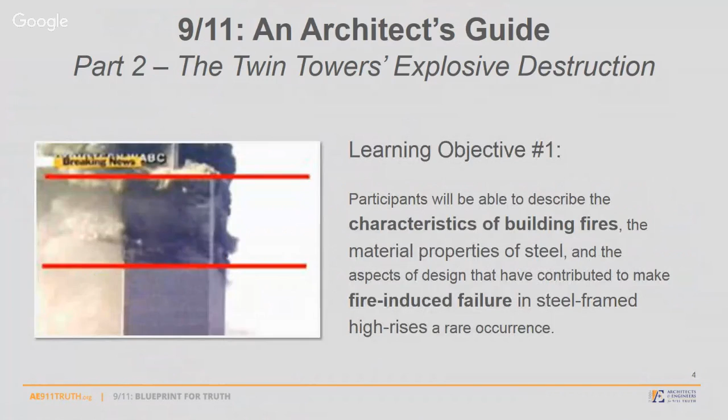We'll be talking about that today particularly. So let's see what we're going to be expected to do as a result of this course today. You'll be able to describe the characteristics of building fires, the material properties of steel, and the aspects of design that contributed to make fire-induced failure in steel frame high rises a rare occurrence - in fact, only 3, and all on 9/11.

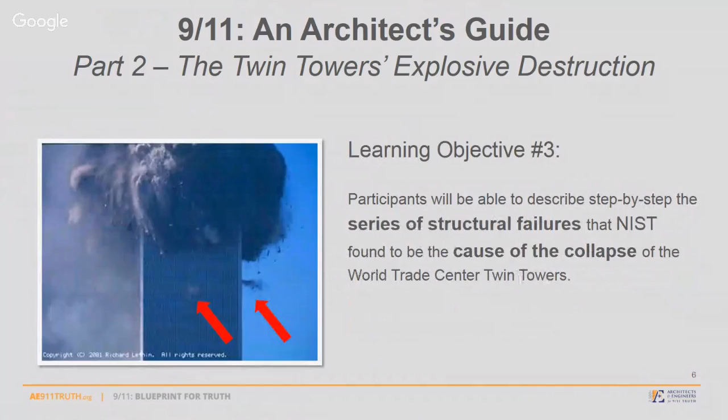We'll be able to recognize the distinct features associated with fire-induced failure and those associated with controlled demolition. We'll also be able to step-by-step describe the series of structural failures that NIST found to be the cause of the collapse of the towers, and analyze the physical evidence and dynamics of the collapses, and see how they're consistent with fire-induced failure or controlled demolition.

So to help us in that, today we'll be looking more specifically at explosions, a sudden near free fall collapse, high velocity lateral ejection, shattering of the steel frame, and the midair pulverization of the concrete.

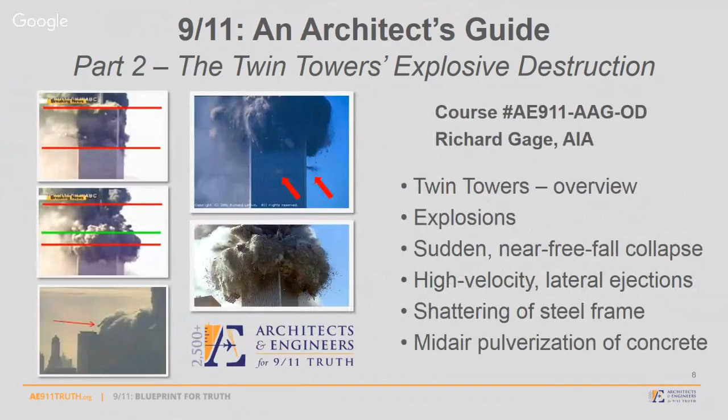So when we look at the Twin Towers, we've got a lot to consume today, but I wanted you to know a little bit about myself. I've worked on these $3 and $10 million gymnasiums and the construction administration for this $125 million high school in the San Francisco Bay Area. More recently, in the Las Vegas area, this $400 million mixed-use project with 1,200 tons of steel framing, where we have commercial parking garage and mid-rise office building.

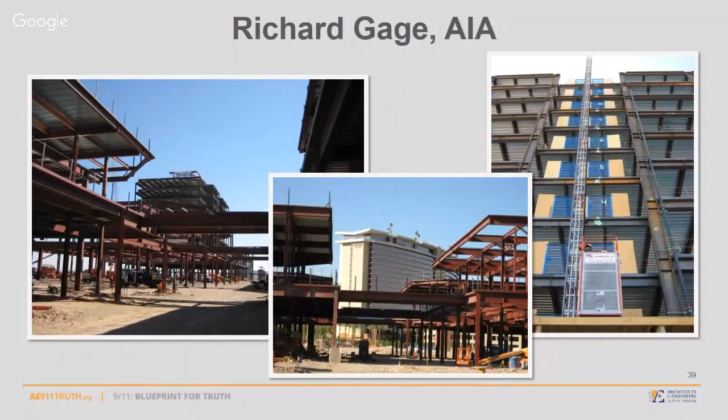But I'm joined by 2,700 now architects and engineers calling for a new investigation of the destruction of the World Trade Center skyscrapers. And you're going to see why they have put their names publicly online, demanding a new investigation.

Well, let's then look at the design first. This was an innovative structure, to say the least, but its design was largely condemned by architects. You can see, for instance, gigantic dumbness, says Robert Stern, versus others cited this sculptural purity of the building's forms in this modern architecture. Well, you can see, compared to the Art Deco design and unfolding massing of the highest building in the world at the time the towers were built, the Empire State Building, that you just, to get the highest building in the world, extrude 2 squares until they become the tallest.

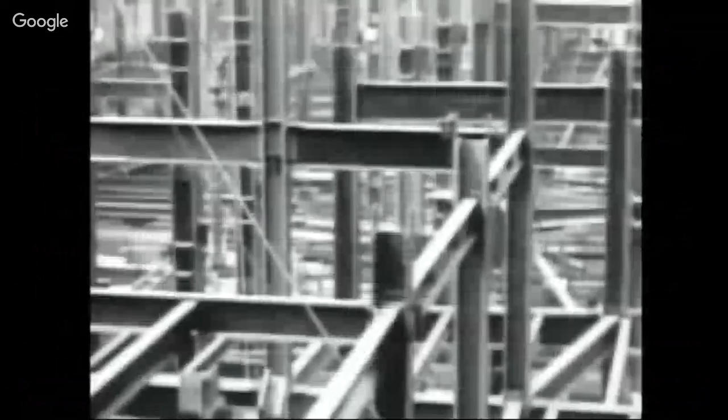So this was quite controversial design-wise. Structural engineering, though, was another matter. Until then, you had a forest of columns traveling through the floor plan, for instance, of the Empire State Building. But in the Twin Towers, it was quite different.

The structure was moved largely out to the perimeter in an exoskeleton with pre-manufactured components of 3 verticals, 3 horizontals, then dropped into place and bolted together, these internally welded components. So it lent itself to rapid fabrication.

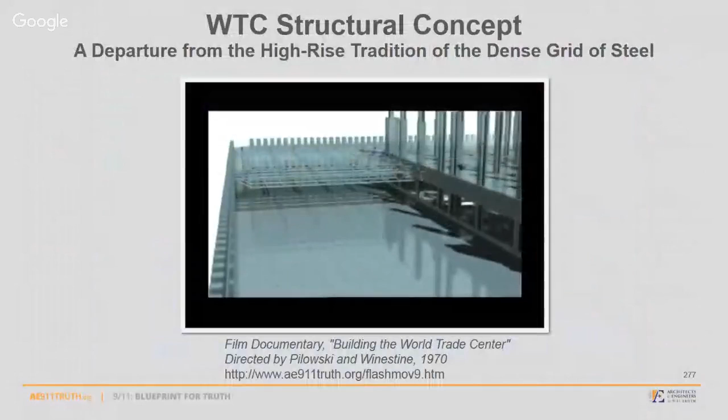On the inside, you had a series of 47 massive core columns, here 3 inches thick. And then between the interior core and the exterior, you have these floor panels composed of lightweight steel trusses spanning up to 60 feet, which allowed for open office planning. You can see that we have 60 feet on the big sides, and the narrow sides 35 feet.

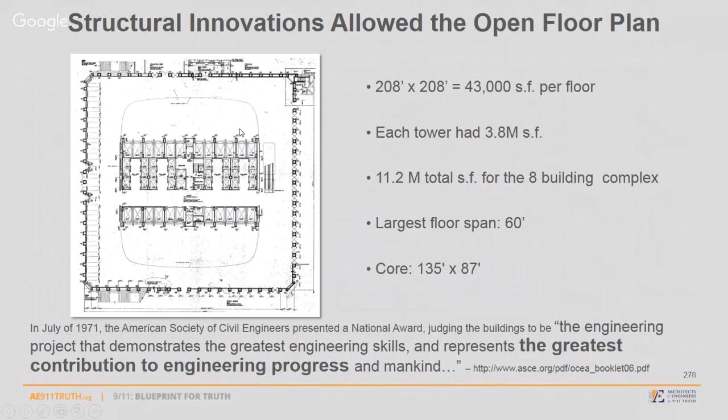This was an innovation structurally, which allowed architectural freedom inside the plan. But there were problems with the Twin Towers. Nevertheless, one of them was this series of marching columns, every 3 feet 4 inches all the way around the building, or 3 feet 9 inches, one of those two. And a relatively low ceiling in this case - I think it's 9 feet.

So there's pluses and minuses, and by most researchers' estimations, the buildings were only half occupied, the floors. We have had some trouble documenting the actual occupancy rate in the building, but nevertheless...

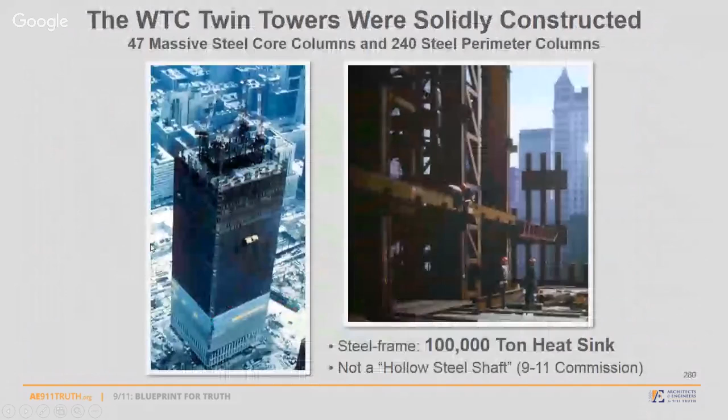You had a massive amount of steel in this building, 100,000 tons of it. It's a massive heat sink that could draw away and conduct through the structure the heat from fire, so that localized failure becomes virtually impossible, except in these lightweight steel trusses, where NIST focuses its problem, its theory for the initiation of collapse.

We'll get to that. Let's first see what happened here on 9/11 and how this official story began to be developed right away. On September 11th, we learned that 4 passenger planes were hijacked and taken radically off course. Within an hour, 2 of the planes had flown into the enormous steel towers of the World Trade Center, creating fires and eventually toppling them.

Dazed by the news, the American public soon believed the fires in the towers had burned so hot they caused the steel frames of the buildings to give way. A myth developed, fed by official sources through the media to a bewildered audience. Elements of the myth: the impact of the airplanes, gallons of burning jet fuel, steel melting, the buildings failing and suddenly imploding. In a mere 10 seconds, 110 stories hurtled earthward, pulverizing into dust.

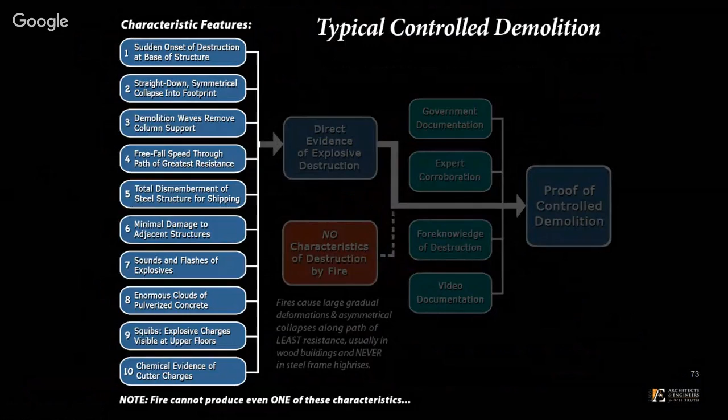So what were they? We found that in a typical controlled demolition there's a sudden onset of destruction at the base of the structure, a straight down symmetrical collapse into the building's footprint, because demolition waves remove those column supports. Number 4, the building falls generally at or near free fall acceleration, straight down through what was the path of greatest resistance.

Number 5, resulting in a total dismemberment of the steel structure. It's broken up, ready for loading and shipment. Number 6, minimal damage to adjacent structures, typically. And then we found that to be the case with respect to Building 7 last week.

I think there's something quite different going on with the Twin Towers, as you'll see, relative to damage to adjacent structures. Sounds of explosives heard by witnesses, flashes of light seen by them. Number 8, enormous clouds of pulverized concrete and very hot gases. Number 9, isolated explosive ejections called squibs.

And finally, chemical evidence of cutter charges or explosives or incendiaries left behind in the destruction. Now, this is all direct evidence of explosive destruction. Fire can't create any one of these, let alone all 10 of them. So if you have these features, you're pretty sure that you have explosive destruction, especially if you have additional corroborating circumstantial evidence like government documentation, which can be very helpful.

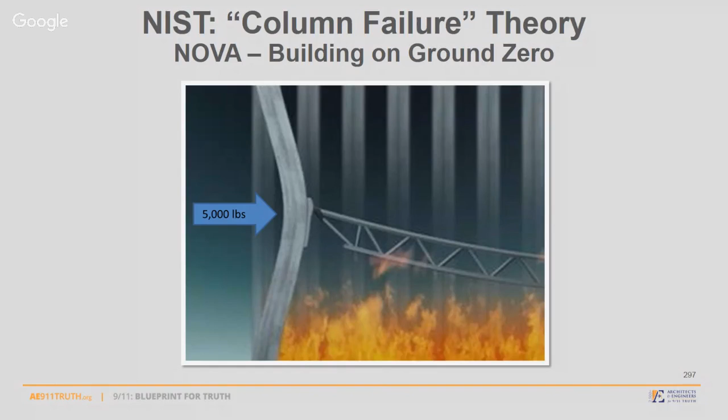But let's start at the beginning. Do we have a sudden onset of destruction at the location of the jet plane impacts? And what would be causing that sudden destruction? Would it be sagging floor trusses, or could it be explosions, for which we would be looking for witnesses that heard sounds of these explosions, saw flashes of light?

Well, let's look at the oral histories produced by Thomas von Essen, the city's fire commissioner in New York, who said he wanted to preserve these accounts before they became reshaped by collective memory. So what does he do? He records 500 of his FDNY and emergency technicians in 12,000 pages of testimony produced by these oral reports, all recorded on tape.

And the court finally, in 2005, ordered the release of documents to the New York Times. And so we didn't even learn for another 4 years that we have 118 of these firefighters observing flashes, hearing sounds, explosions, and other phenomena, which is indicative of explosive demolition.

Let's look at a few of them. We felt the ground shake. You could see the tower sway, and then it just came down. Now listen to the order of this language again and again. We felt the ground shake. You could see the tower sway, and then it just came down.

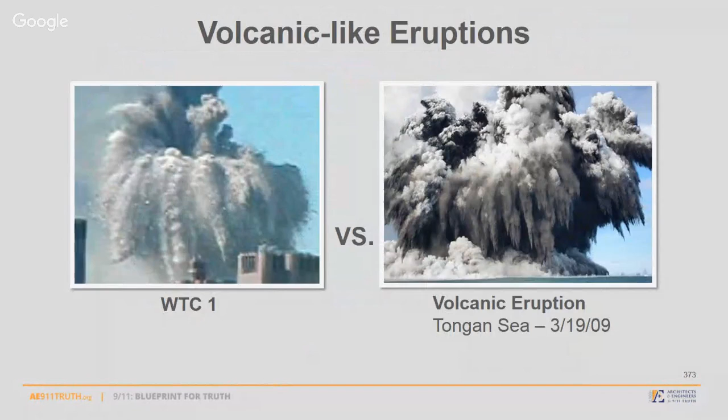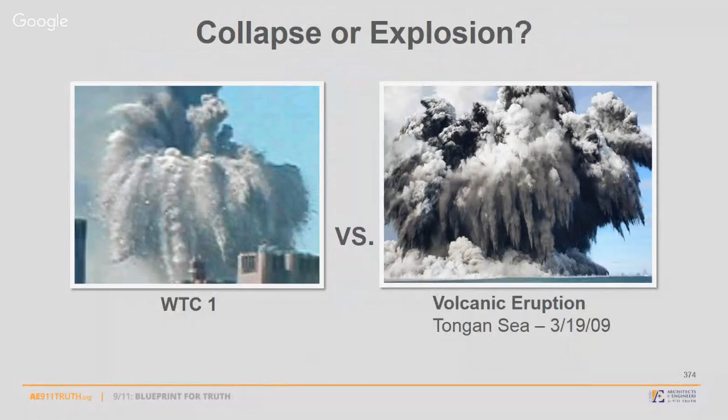There's nothing left to destroy the rest of this building. In fact, it is being destroyed very similarly, interestingly enough, to a volcanic eruption, for instance, in the Tongan Sea in 2009, with upward, outward arching streamers, freely flying laterally ejected structural steel sections trailed by thick white smoke clouds, indicating something very different than a pancaking or gravitational collapse. Is it a collapse, or is it an explosion, or a massive series of explosions? Does it look like, just intuitively, a collapse to you?

Let's look at the South Tower. Here's the South Tower beginning to fall off of its axis, actually, 22 degrees. So we have asymmetrical destruction from the airplane, asymmetrical damage from the fires, and asymmetrical loading from this building mass, which is falling off of the building.

And yet, look from below. Complete symmetrical destruction all the way down the length of the building, until this particular photographer decided to run anyway. But down below, take a look at what happens. Are we seeing a collapse or a series of explosions hundreds of feet below the zone of destruction up above? What are we looking at?

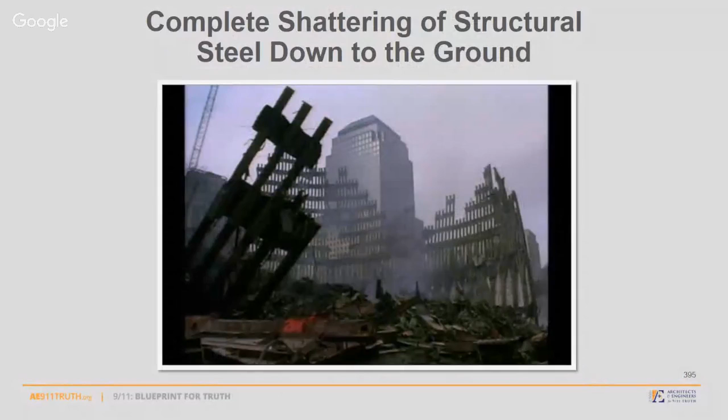And shattering the structure completely, all the way down to the ground. No building components that are recognizable, save these remaining shards of exterior perimeter walls. And look at the columns and beams themselves, deeply reddened, oxidized, convex on one side, concave on the other, indicating a side concussive blast. And many of these beams in extreme hot temperatures, which we'll get to next week, causing these beams to look like noodles.

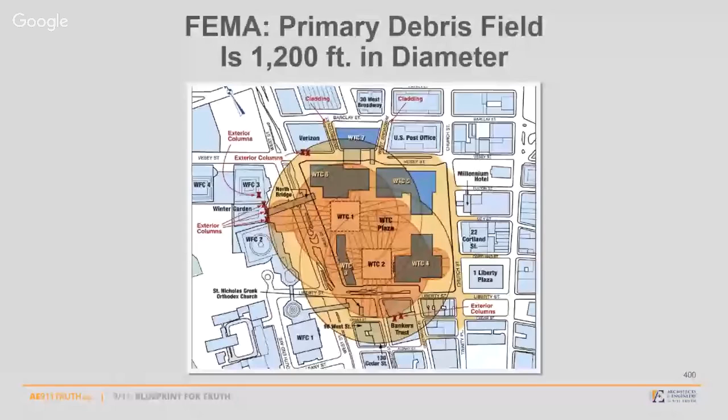A very explosive destruction we're talking about with regard to the Twin Towers. Let's look at some examples of that explosive destruction as we look at squibs, or isolated explosive elements occurring here, up to 60 stories below this zone of destruction. There's no rational explanation for these. NIST says, well, there was air pressure being produced by that pile driver pushing air down through the elevator hoistways, and it's got to come out somewhere, right? Well, this is not air.

These are pulverized building solids, and they occur at speeds up to 200 feet per second, and they occur in an engineered pattern. And besides, if this was air being produced by this non-existent pile driver, we would expect it to fill that open office planning space uniformly somewhat, and then maybe blow out all the windows on that floor. Not these highly focalized, pinpoint accurate, violent ejections that occur often in a fairly engineered pattern, sometimes at the center of the facade of these buildings.

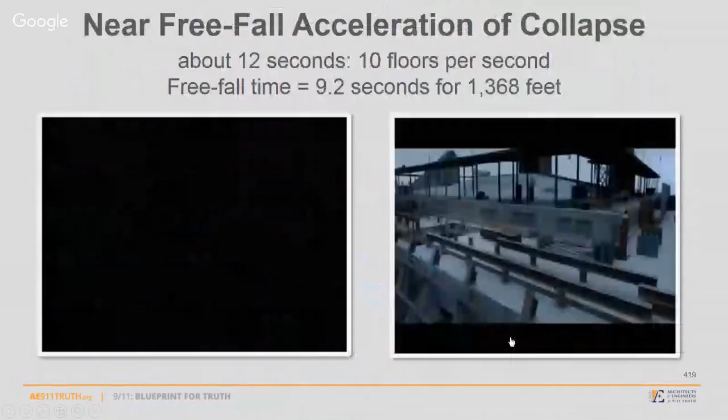We're here tracking the motion of the roof line at 0.2 second intervals for approximately 32 meters or 8 stories. This graph shows the height of the roof line as a function of time. This is simpler if we plot velocity as a function of time. On this kind of graph, a straight line indicates constant acceleration. First note that there is a sudden onset of collapse, as the point we are tracking makes a sudden transition from being at rest to an approximately constant downward acceleration. The slope of the graph indicates that the acceleration is 6.31 meters per second squared downward, which is 64% of free fall.

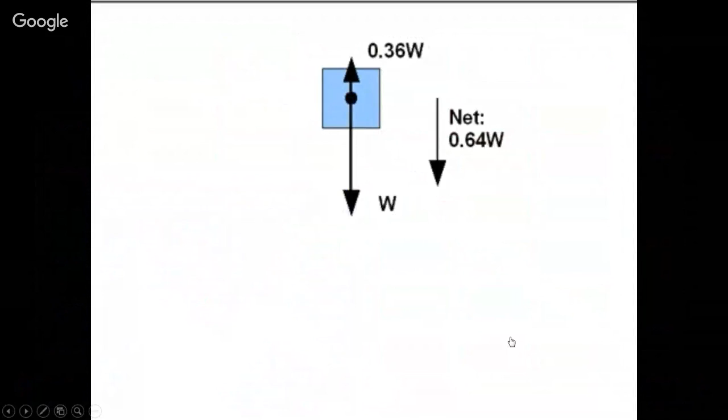In other words, once it starts falling, the upward resistive force is only 36% of the weight of the falling section of the building. So far, so good.

But now turn it around. Newton's third law says interactions between objects work both ways. The forces two objects exert on each other are always equal and opposite. If the upward force acting on the falling block is 36% of the weight of the falling block, the downward force exerted by the falling block must be exactly the same, 36% of the weight of the falling block.

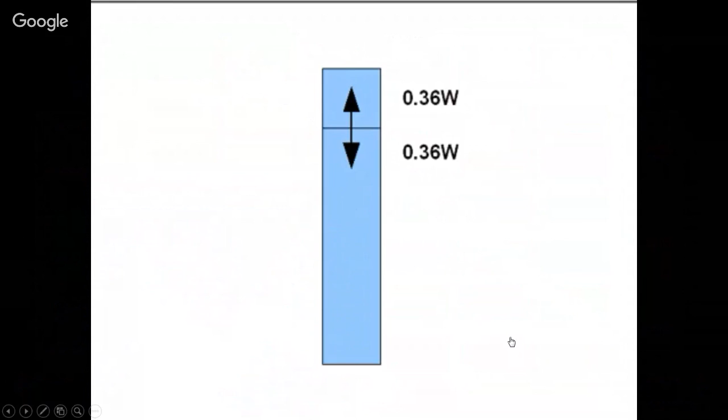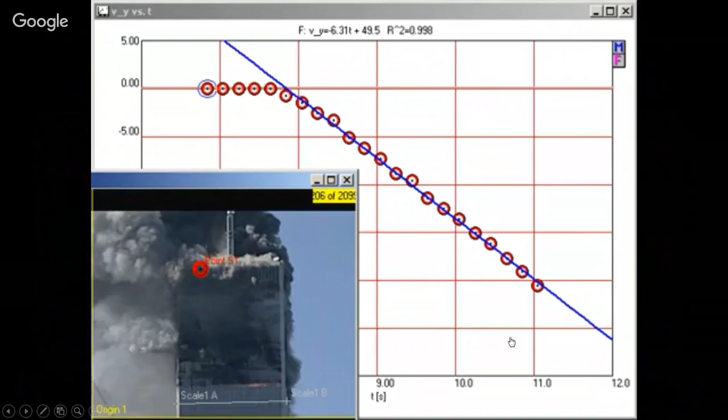In other words, the top section of the building is exerting less force on the lower, stronger, undamaged structure than it would if it were simply sitting motionless. Therefore, as long as the top section of the building is in uniform downward acceleration, it cannot possibly be providing sufficient force to destroy the building.

Another way to look at this is, first of all, the amount of steel that has to be crushed in order for this building to collapse - 100,000 tons, to be exact, maybe 80,000 tons underneath the point of jet plane impacts. As if it weren't even there, because this building is accelerating. It's getting faster and faster. It's not decelerating. It's not slowing down at all.

In other words, these columns are not doing the work that they're capable of. Let's look at it this way. You hold a 15-story section of this building, like the North Tower, above the point of jet plane impacts, with a crane, over nothing at all on the right. And on the left, we put, say, 80,000 tons of structural steel framing designed to resist that load 5 times stronger than it needed to be in order to resist that load.

Now we're going to pull the lever and drop these all at once. What happens? The building on the right is going to fall at free fall because there is no resistance, because there are no columns. The building on the left is going to slow down. This is intuitive. We learn this, we get it. Even in the 7th grade, we understand this.

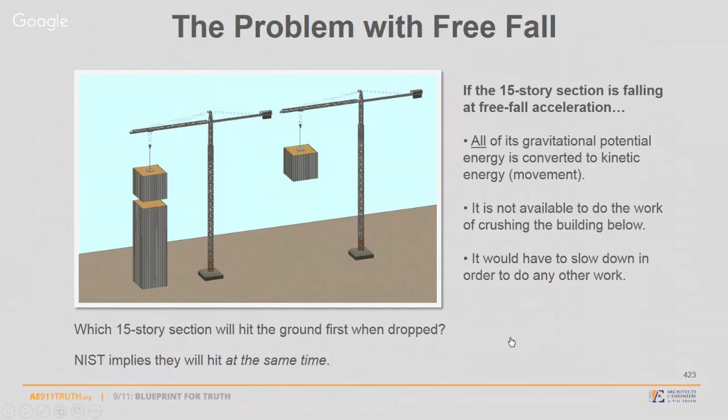But NIST's theory would have us believe that those columns weren't even there, even though they were. So what happens? Let's listen to Massimo Mazzucco from The New Pearl Harbor, September 11th.

Something of this kind is what we should have seen when the top section of the towers collapsed onto the lower one. The upper and lower sections should have mutually destroyed each other until all the energy is dissipated and the system comes to a rest.

Alternatively, as shown in this experiment with 2 towers made of snow, the top section could have fallen off to the side after the initial collapse. What could not have happened is this: a little tiny chunk of the building can't possibly fall and crush the entire structure below it.

This is such a simple, fundamental concept that architects and engineers were astonished in seeing it totally ignored by NIST. This is high school physics. And our whole society is being led to believe that these fundamental laws of physics, hard science, don't apply anymore.

This is why we have 2,700 architects and engineers calling for a new investigation. This is why we have peer-reviewed papers published, like this one, reprinted from the International Journal of Protective Structures by Gregory Urich, Tony Szamboti and Richard Johns. Let's look at the total dismemberment of the steel structure.

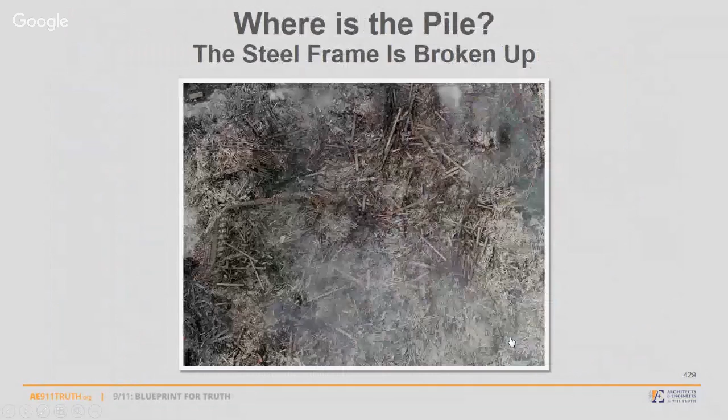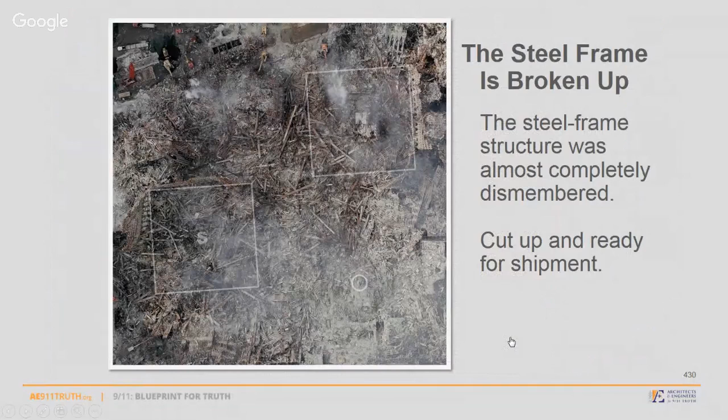Is that the case? How does a building that falls due to natural causes completely dismember into its individual structural elements, where the steel frame is completely shattered, and of course, outside the footprint, you see here the Twin Towers cut up, ready for loading and shipment into the original lengths of the beams, columns.

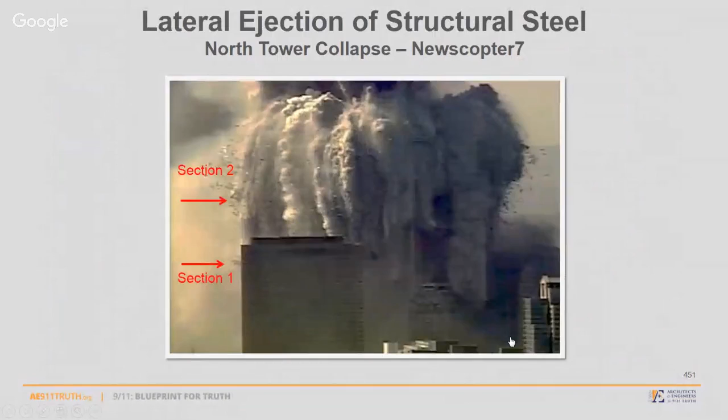Do we have a lateral ejection of these steel elements? Well, take a look at these freely flying structural steel sections, individually flying, landing 300 to 600 feet away. Let's focus on this one for a second. This one is traveling forward 2, 3, forward 2, 3, back 2, 3, forward 2, 3.

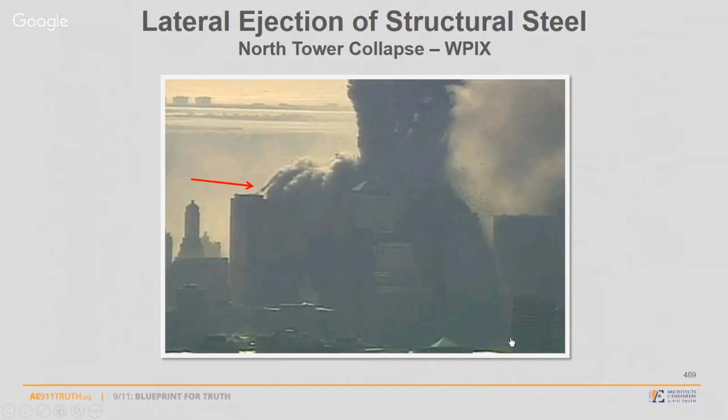This is a 45-degree angle. The lateral component of this element, which is clocked at 60 or 80 miles an hour laterally, is not accountable by the official story, which is a gravitational collapse. Gravity works down. Something else, like explosives, for instance, can work out.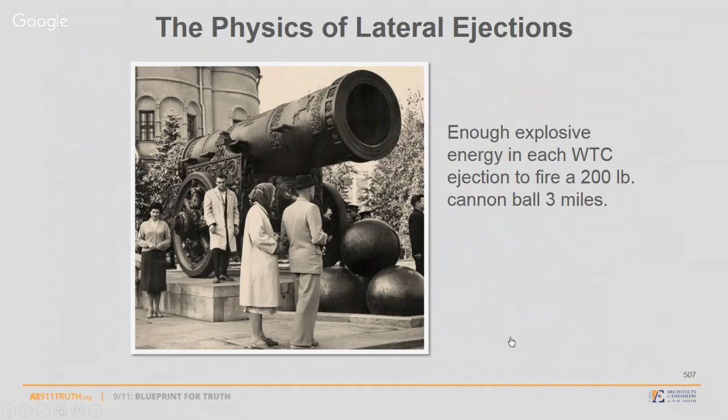In fact, there's enough explosive power there to send that 4-ton structural steel unit up to 600 feet away, as much as firing a 200-pound cannonball 3 miles. This is an explosive force.

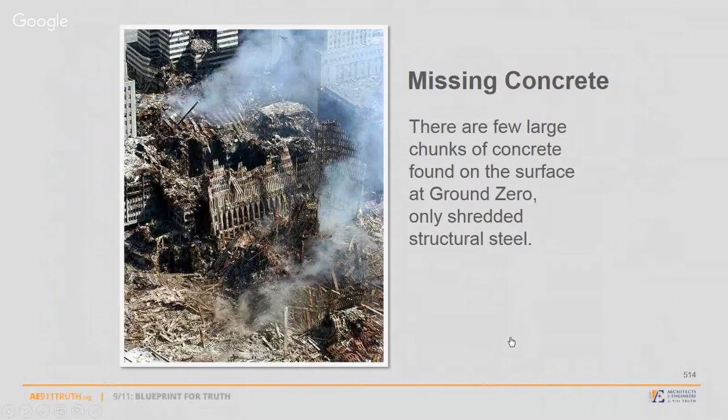We have a hard time finding any of them. So what happened to them? They're composed of 90,000 tons of concrete. What happened to that concrete? It's not at the base of the tower. It's not outside the towers, at least not in any form we can recognize. What happened to it? Well, it's being pulverized in midair.

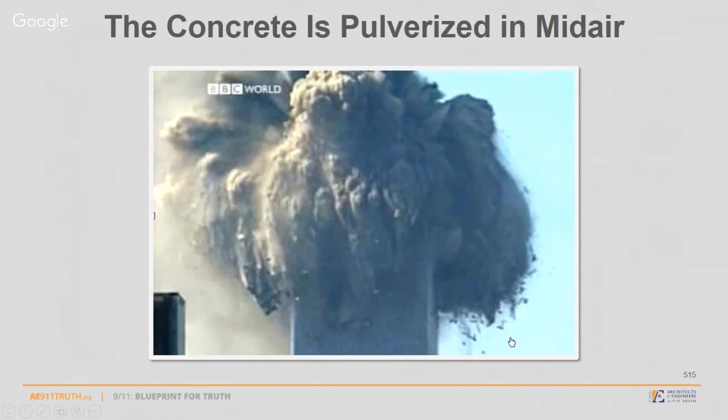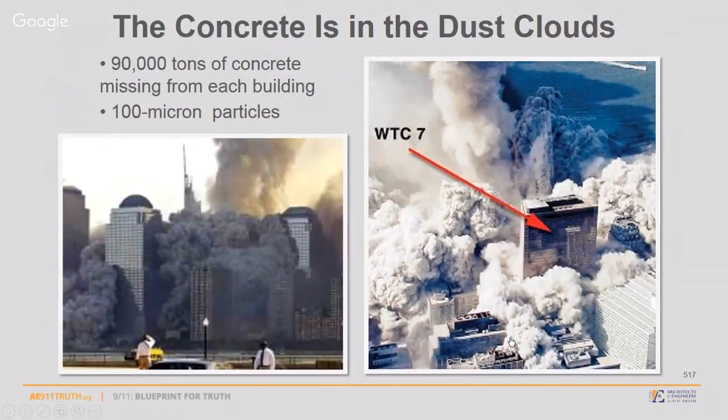What is pulverizing the concrete in midair at the onset of the destruction of this building? Not when it develops its gravitational potential energy and comes all the way down to the ground. No, it is being pulverized into 100 micron particles on average, spread river to river across lower Manhattan in a 4-inch thick pile of powder.

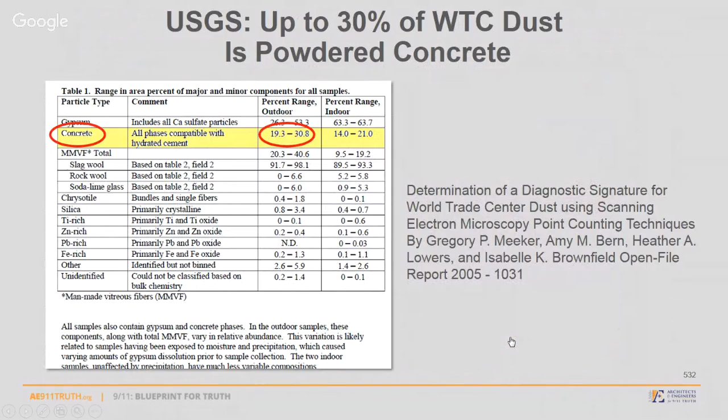30% of the dust is composed of this fine concrete powder. That takes tremendous mechanical energy or explosive energy.

The governor of New York puts this in perspective: 'And you see, there's no concrete. There's very little concrete. All you see is aluminum and steel. What happened to the concrete? Concrete was pulverized. And I was down here Tuesday, and it was like you were on a foreign planet. All of lower Manhattan, not just this site, from river to river, there was dust powder 2-3 inches thick. The concrete was just pulverized.'

What I expected to see was nothing like what I actually did see at the time of my arrival at the site. There wasn't much that you could describe. Everything was dust and metal. There were no typewriters, no chairs, nothing.

In April 2006, New Yorkers were distressed to learn that bone fragments, human remains from 9/11, had been found on the roof of the nearby Deutsche Bank building. How in God's name did those fragments get there? And bone fragments less than a centimeter long. How could they be so small?

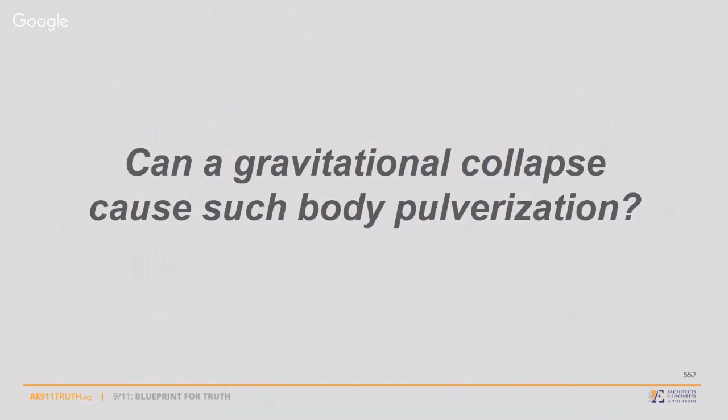We believe that the hypothesis of explosive demolition is corroborated. But what do you think? Do we have, so far in this first part of the Twin Towers evidence presentation, the key characteristics of explosive demolition? We'll get to the incendiary evidence next week. Can fire explain any of these, let alone all of them? Do we have additional corroborative circumstantial evidence that supports proof of controlled demolition?

This is the question we ask ourselves as technical and building professionals, as members of the American Institute of Architects, who rubber stamped—basically, with a few minor suggestions for changes in the final report—the theory put forth by NIST of the initiation of collapse by fire, ignoring the explosive evidence. We can't expect the AIA to conduct their own fully-fledged investigation; they're not resourced. But we can call for a new investigation, and that's what we're doing today, and that's what we're asking you to join us to do.

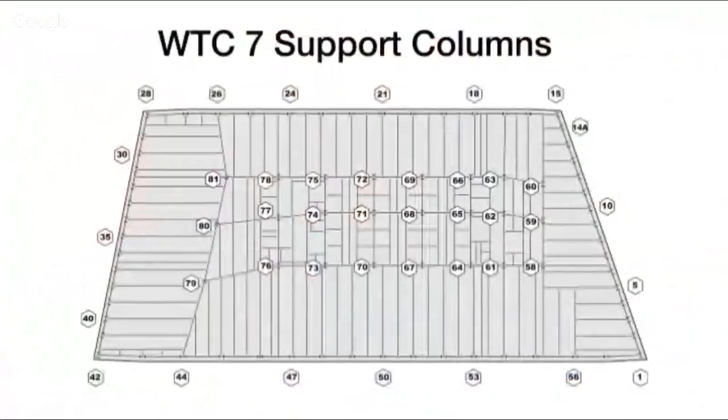Call it conspiracy theories, and there are lots of them. They can go on—we can speculate on that forever. What we really need to know is how those buildings... World Trade Center 7 collapsed because of fires fueled by office furnishings. It did not collapse from explosives or from fuel oil fires. To undermine scientific integrity is to undermine our democracy. This is what NIST has done—denied and ignored crucial evidence. The American people absolutely need the truth of 9/11. More than 1,500 architects and engineers and 12,000 others, including many scientists, have signed the petition calling for a scientific investigation of the destruction of the Twin Towers and World Trade Center Building 7. The report issued by the National Institute of Standards and Technology, referred to as NIST, was not valid science. They're talking about a single columnar collapse or failure that resulted in a total collapse of the building. The building descended in free fall for the first 100 feet, which means there was absolutely no resistance to descent whatsoever. So all of the columns really needed to be severed at the same time. The symmetry is the smoking gun. NIST has admitted it went into free fall for 8 stories. You don't need to be an engineer or an architect to see what happened to those buildings.

Dit is controlled demolition. Zeker weten. What I saw, it was a classic implosion. The center of the core, the penthouse area, starts to move first, and then the building follows along with it.

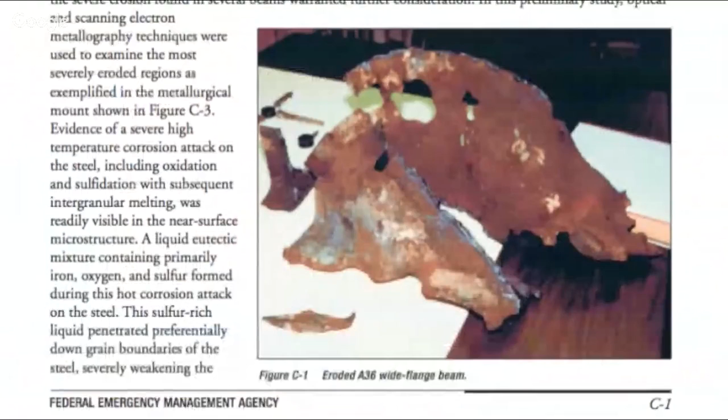NIST excluded the documents from FEMA and Appendix C that documented the evidence of melting steel. In an office fire, you cannot generate enough heat to melt steel.

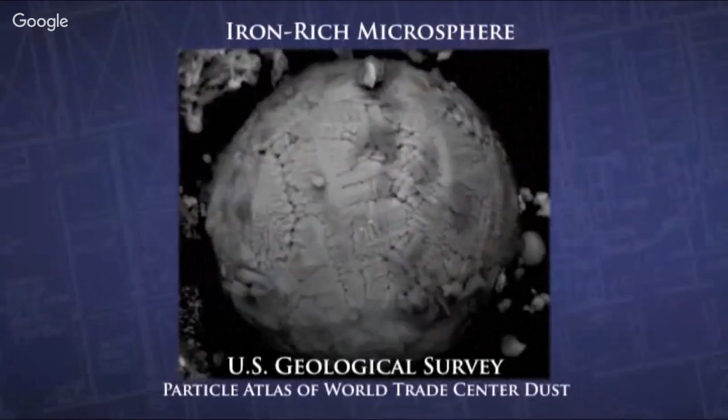There were these iron microspheres present in all of the dust samples. They needed to have been formed in extremely high temperatures. All the characteristics of the microspheres, along with what I see in the attack of the beams that were actually found, tell me that thermite was involved. In the dust, what we have found is a modern version of thermite, which we call nanothermite.

That they found no evidence for explosives. So then we asked them, well, did you look? And they said, no, we did not look for explosives or residues of explosives. And in fact, the evidence is overwhelming that these red-gray chips are very high temperature incendiaries.

And we have watched as scientific integrity has been undermined, scientific research politicized in an effort to advance predetermined ideological agendas. If this is a crime, I think everybody agrees it's a crime. Evidence was removed from the scene of the crime. You can't do science when you are deprived of the evidence and when your hypothesis is the least likely instead of the most likely. And the most likely hypothesis in the case of Building 7 wasn't even mentioned. This is not science.